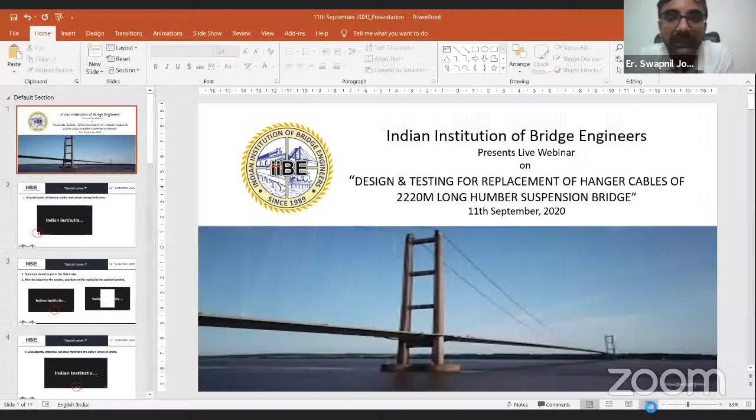Yes. Can I do the broadcasting? Yeah, okay, no problem. We can do, na sir?

Vinay sir, we can broadcast, right? Yes, broadcast kar dijiye. Only I hope that David is able to join. He's facing problems.

You have sent the panelist link, na? Yes, sir. Okay, then why is he not joining? Just now also, I just resent it again.

Sir, he's showing in the attendee list. I'm just promoting him. Okay, okay, promote him. He's joined from the wrong link. Doesn't matter.

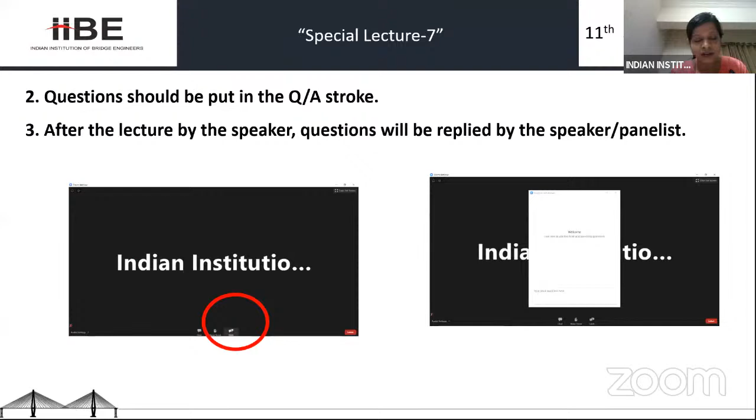Thank you, Deepika. Good evening, everyone. Before we start the event, I would like to read the basic rules and guidelines for all the participants. All participants will remain on mute mode during the lecture. Questions should be put in the question and answer section. After the lecture by the speaker, questions will be replied to by the speaker and panelist. Subsequently, attendees can raise hand using the option on screen. During questions, specific participants will be unmuted by the organizers.

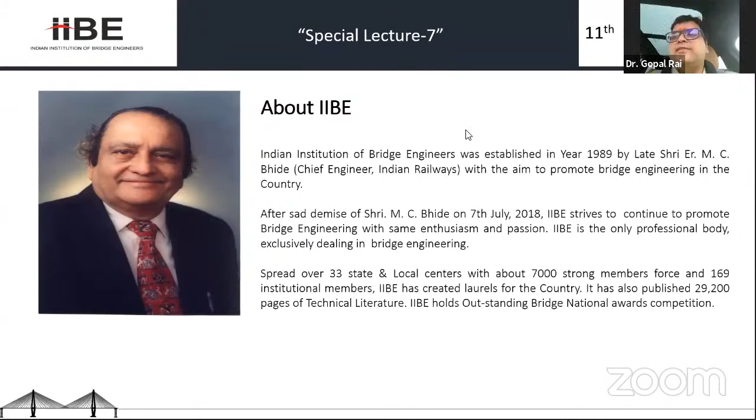Let me introduce our Director General, Engineer Dute ji. He retired from Indian Railway as PCE. He is an engineer from COEP College of Engineering, Pune.

Always, for any decision, he takes a pause, but after 2 minutes of pause he is very firm on his decisions. Such an eminent Director General, under his guidance and blessings, things are going in a very positive direction. He always supports the young generation and encourages doing a lot of activity. He is the next person after Bhide sir from whom we take a lot of guidance and encouragement, and he encourages a lot in lighter moments too. Thank you very much, our Director General, Dute ji.

Thank you very much. Next, our President, Vinay Gupta ji, one of the stalwarts in bridge engineering from TCPL, having bridge engineering experience of more than 30 years, having designed all kinds of structures in bridge engineering. Let me give a short introduction to IIBE as a president. If today IIBE is revamped, in Hindi we can say Junodhar. Junodhar means after Bhide Saab left, something has been revamped and reconstructed in the IIBE forum only because of Vinay Gupta ji.

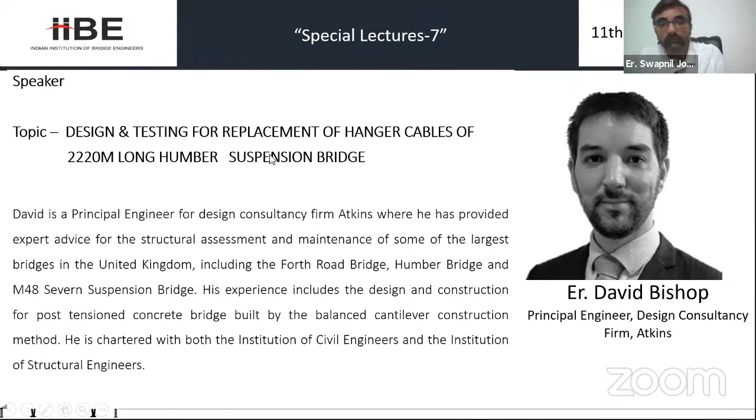He is going to speak today on design and testing for replacement of hanger cable of the 2.2 kilometer long Humber suspension bridge. David is the principal engineer for design consultancy Atkins, where he has provided expert advice for the structural assessment and maintenance of some of the largest bridges in the United Kingdom, including the Forth Road Bridge, Humber Bridge, and M48 Severn suspension bridge. His experience includes design and construction for post-tensioned concrete bridges built by the balanced cantilever construction method. He is chartered with both the Institution of Civil Engineers and the Institution of Structural Engineers. With this brief introduction, may I now request our speaker, Engineer David Bishop, to take over the forum and start his presentation.

This is Vinay Gupta here. While the speaker sets up his screen and other things, first of all, I'd like to thank the other people who have joined later on - the eminent dignitaries, Mr. Ravindra Goyal, Mr. Manjure, and of course many others.

I just want to share with you how this whole lecture came about. I contacted the HOD Civil Engineering of Atkins, Mr. Chris Handy, and he replied after a while saying, look Vinay, I just returned from 2 weeks of annual leave and I'm too tight pressed with time, but I certainly will spend time on a lecture with you after a while. He gave some options, and then one option from his own company Atkins UK - Mr. David Bishop, who was personally involved in the replacement of hangers of the suspension bridge. Now we all know that any cable-supported bridge is said to be fragile.

It needs to be made more long lasting and durable by several means. Any cables that we provide must be replaceable, whether it's a cable stayed bridge or an extradosed bridge. I won't say only extradosed cables can be replaced, or in a suspension bridge, which is very important.

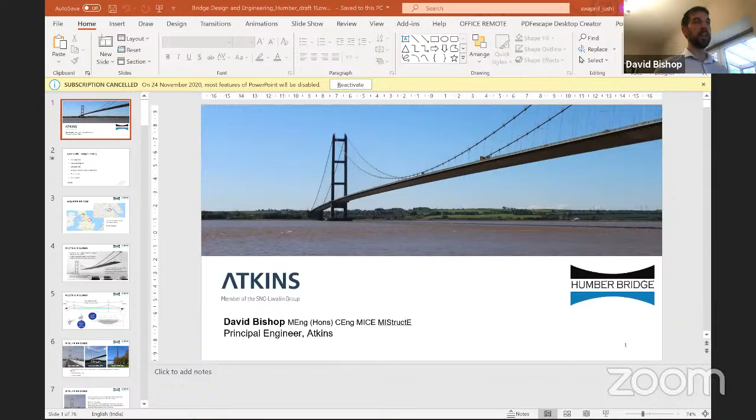If we go on to the next slide, please, you can see the agenda for the meeting. First, I'm going to talk about an introduction, then facts and figures of the structure, the background, and really the reason for carrying out this testing—there's been very detailed testing carried out of the hangers. Then the analysis and testing specification we put together for the bridge, the test conclusions, and the results of that testing will be presented.

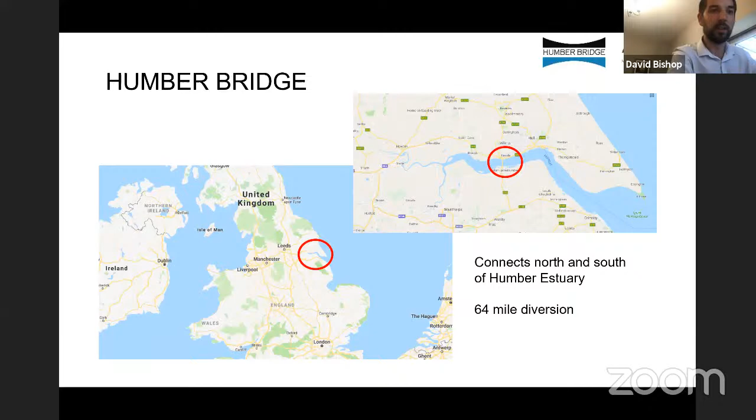We go on to the next slide, to tell you a little bit about the Humber Bridge itself. It was opened in 1981. When it was opened, it was one of the longest bridges, or longest main spans, in the world. At the moment, we believe it's still around the 11th longest bridge in the world. It's certainly a major feat of engineering. It is the longest suspension bridge in the UK, and it's still the longest in the world to walk or cycle across. It was the first suspension bridge to use reinforced concrete for the towers—previously they were all steel.

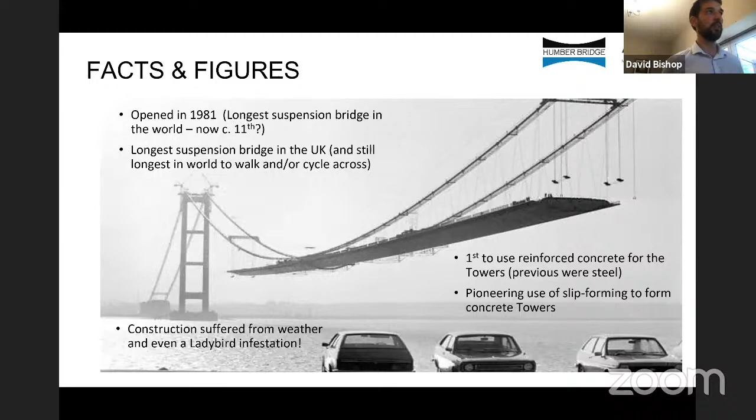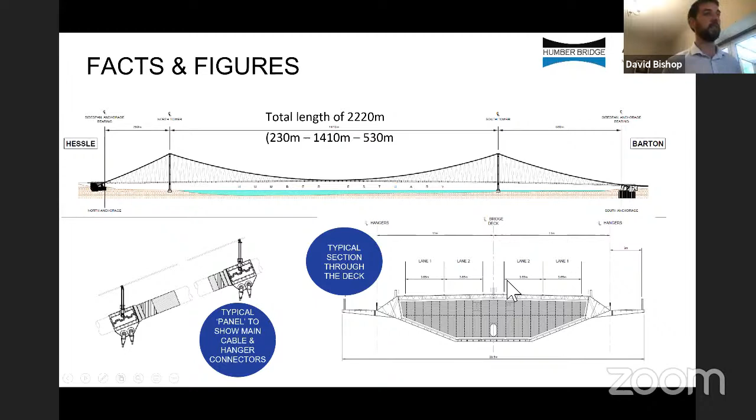So on to the next slide, we can see, I believe, 3 different bridges that were constructed by Freeman Fox and Partners. The Severn Bridge was constructed in 1966. It was the first bridge, and it had significant issues due to the inclination of the hangers. The hangars had first reported wire failures of individual wires after 8 years in service. After 22 years of life, all the hangars of the Severn Bridge were replaced. The reason for this replacement was partially manufacturing errors in terms of the alignment of the hanger and the socket, but also because of the way the bridge is comprised of triangulation of the hangars—there was a significant difference in hanger loads between the hangars inclined towards the tower as opposed to the hangars inclined towards the centre of the bridge. I'll talk at length about that later on.

The Bosphorus Bridge, built in 1973, had its hangars replaced in 2016. Interestingly, the hangars for that bridge were replaced with vertical stay hangars. So we were approached by the Humber Bridge Board in 2017 and asked—well, our hangars have been in service for 38, 39 years.

Should we be replacing our hangars? And if we do need to replace them, how do we replace the hangars? So if we go on to the next slide,

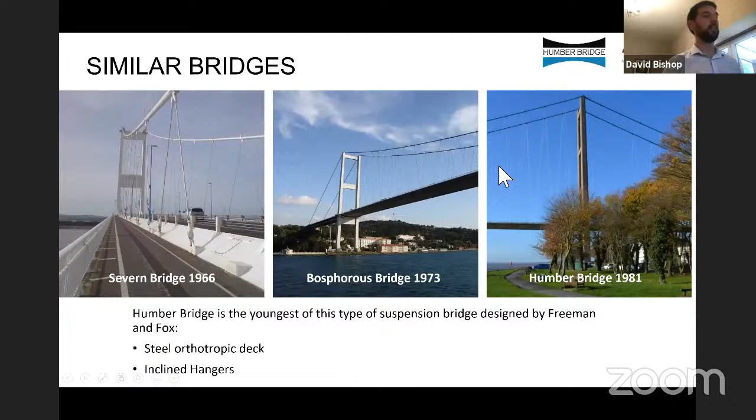this talks in detail around the Severn Bridge and the issues that I just highlighted. So 22 years when the hangars were replaced, the fatigue life was adversely affected by the difference in the permanent loads in the hangars that were caused to go slack.

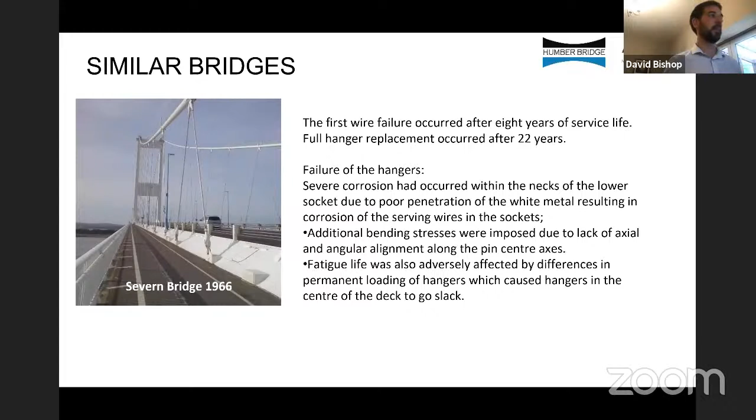If you go on to the next slide, this shows the Bosphorus Bridge, and it shows how the hangars were replaced. The hangars being replaced with vertical members rather than inclined hangars to take away the issues of the inclination.

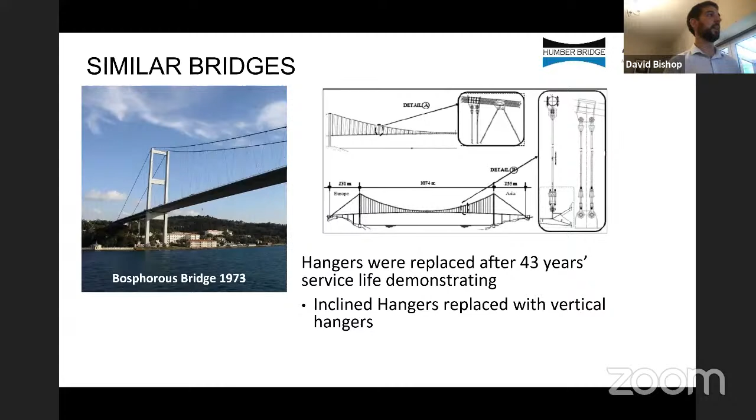The next slide will show you the Humber Bridge hangars and the connection to the deck section. Now the Humber Bridge has 484 hangers. The hangar life is approximately 25 years, or was designed to be approximately 25 years. So having currently got 38 years in service, the hangars are old and they're due for replacement.

However, what we quickly determined when we went to site is that they were in good condition. Visual inspections throughout its life had kept the hangars in reasonably good condition without much sign of corrosion.

Now on the right hand side there, you can see a little bit of a makeup of the hangars. It shows that the hanger cable, the lower socket, which allows side sway movement of the bridge, also longitudinal movement of the bridge, which helps to reduce the bending forces within the cables.

The articulation link between the main cable and the deck stool also allows a minor adjustment of 8 mil plus or minus to change the load in the hangars. And that was used for during construction. So we go on to the next slide.

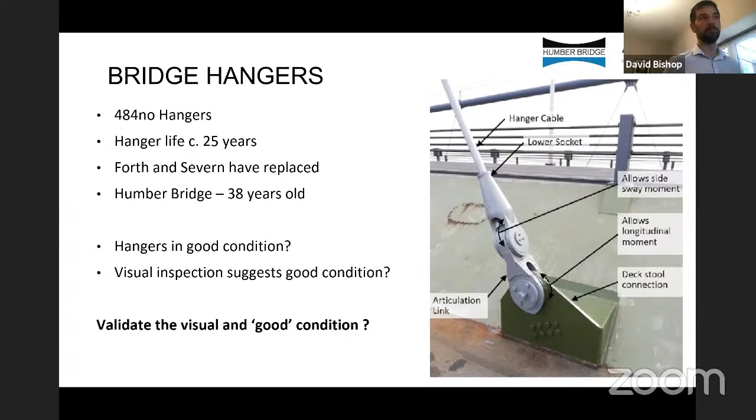So what we're looking at, is it feasible to replace all the hangars in situ without closing the road? Or is it feasible to carry out hanger testing of these hangars to see if we can keep the hangars in physical condition? Now, we decided there was a significant cost benefit if we carried out extensive testing of these hangars to prove that they had significant design life left.

Now, physical testing meant that we had to do fatigue and ultimate tensile testing in the zones of the highest stress. So part of our exercise was to determine which hangars were the most critical and highly loaded, and also to avoid structural health monitoring infrastructure. It should be noted that this building is a listed building consent, so rules in England are such that...

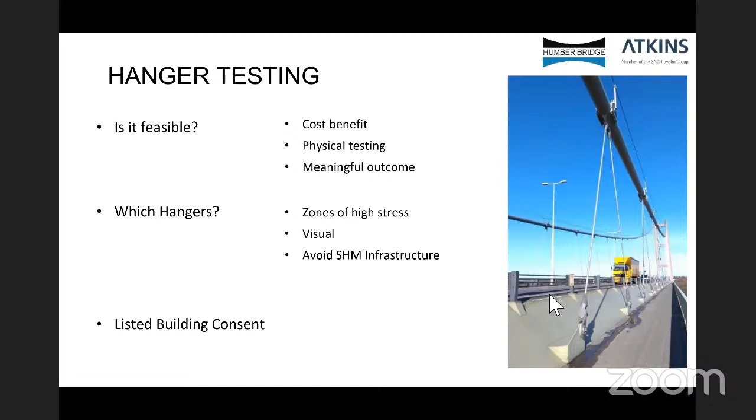So we put together a team, and the project team put together by Humber Bridge Board was Atkins as the designer and the structural checker of the bridge. Spencer British Engineering is the contractor who's going to carry out the construction works. COWI was supporting them in some temporary works designs of access platforms. Bridon-Bekaert Ropes Group are the fabricator of the new hangars that were going to be put in place for the bridge.

DNVGL are the team that are carrying out the extensive testing. So we look on to the next slide.

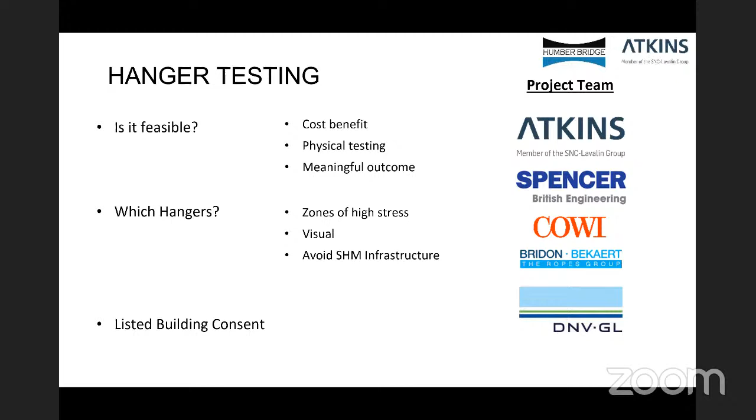Our structural analysis of the bridge found that the hangars immediately off center of the center of the bridge had the highest both dead load and highest load in service. This was critical because it had the highest fatigue range.

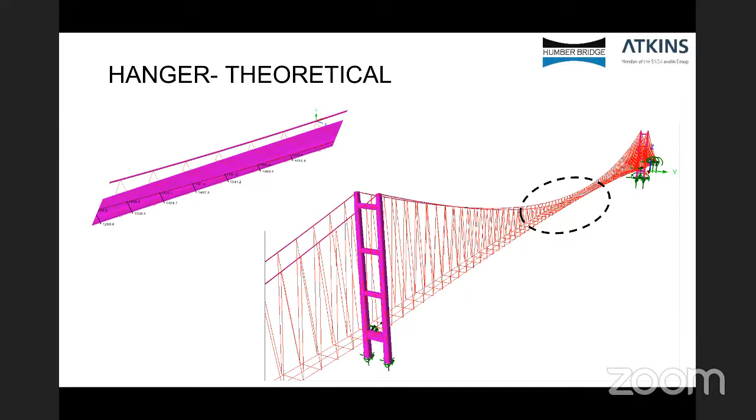This shows the hangers from the visual survey that was carried out to look at the condition. Using a combination of the worst fatigue loading on the hangars together with the condition, we were able to identify the worst hangers on the bridge for a destructive test. The one in red there is hanger 16-17, and it was one of the ones selected for replacement and testing, along with two other hangars.

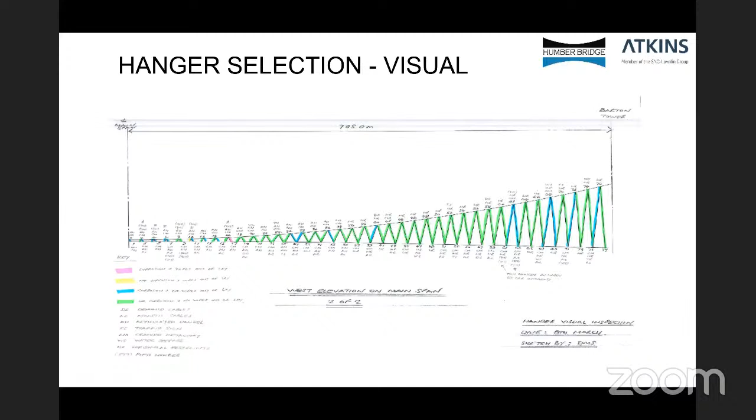So at the end, we selected 3 hangers from the west side of the bridge. This details the 3 hangers. What we wanted to do is select hangars that were going to adequately represent all the different conditions of the hangars, but also that were possible to replace in an easy manner without damaging the hangars. These hangars ranged from 9 meters down to 4 meters in length and were considered the best hangars.

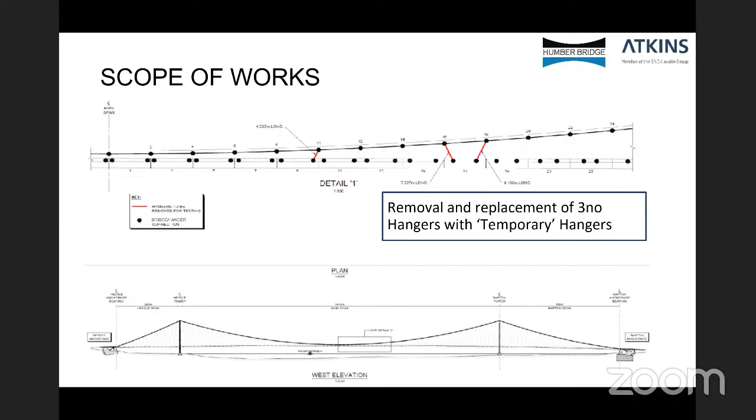This gives you some of the details around the temporary hanger arrangement. There were various options chosen, but what was critical for the design of the temporary hangers is that the hangar creep and elongation over its in-service life didn't cause a significant change in the load pattern of the bridge. If we installed a hangar that hadn't been correctly shaken out with correct frequency analysis and frequency loading of the new cable, that would cause a distribution of loading throughout the adjacent hangars.

To avoid that, the best hangars we could find were fully locked coil hangars that were adequately loaded. For that reason, we were replacing the existing spiral strand hangers with fully locked coil hangers.

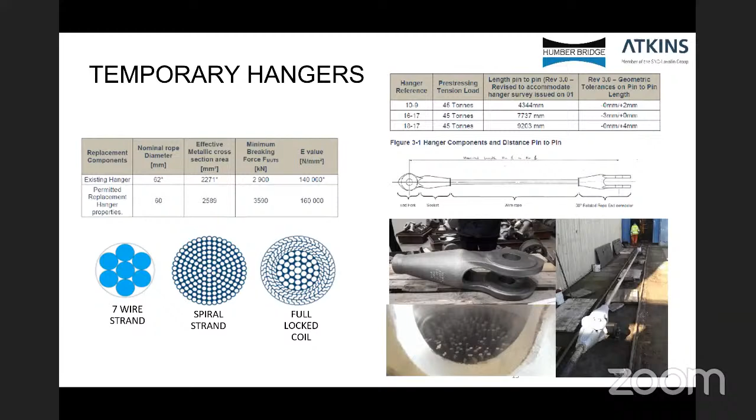So the hangars were assumed or designed to be in equal loading between the triangulations. To accommodate that, there was a small cam at the bottom of the hangars that allowed adjustment of the length to ensure the hangars were the correct length.

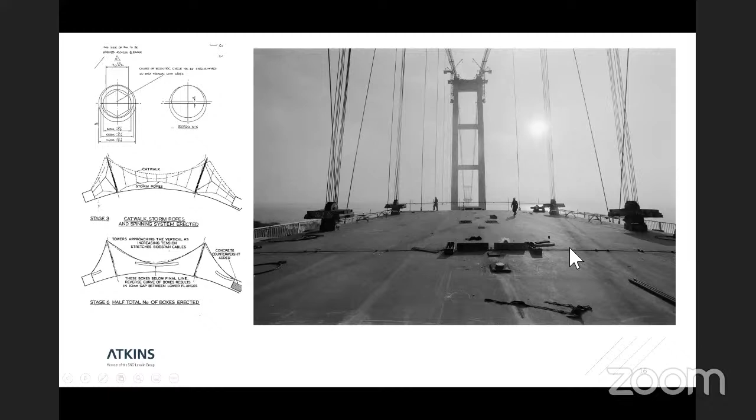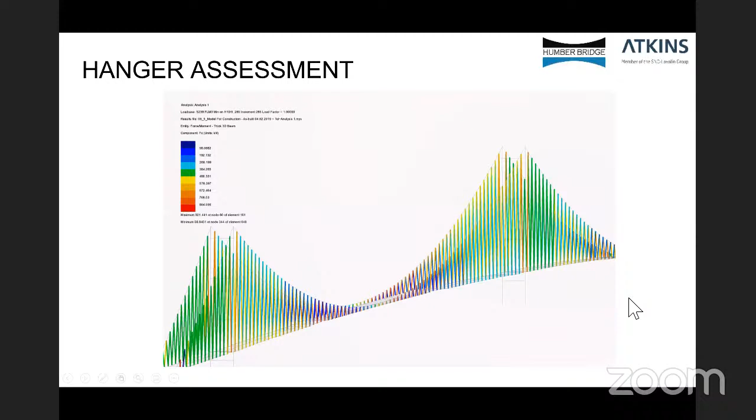So what we found is that the nominal load in the hangers aligned with our analysis rather than the original design of the bridge, whereby the hangers should have been equally loaded.

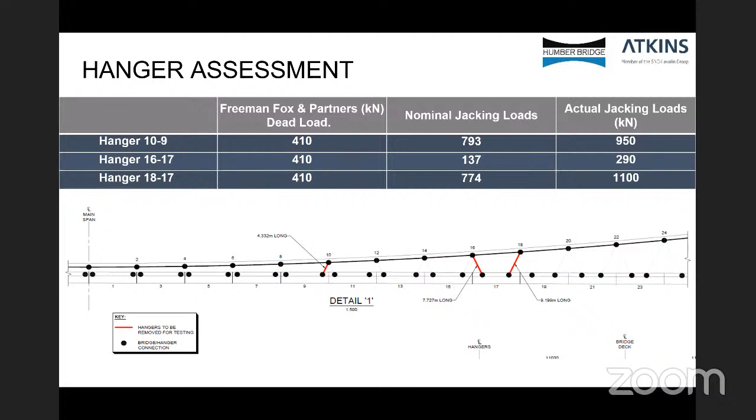This is another part of how we did the assessment. We use weigh-in-motion data, which as vehicles pass, weighs the vehicle, counts the number of axles and the size of axle loadings. From there, we use statistical distributions to calculate the theoretical worst convoy of vehicles, and we use that as the bridge-specific assessment live loading - used as the worst case assessment. If we use normal standard codes for loading, the bridge would be assumed to be overstressed, because loaded lengths of this length have a significantly lower probability of having high intensities of loading. This is taken into account by the bridge-specific assessment live loading.

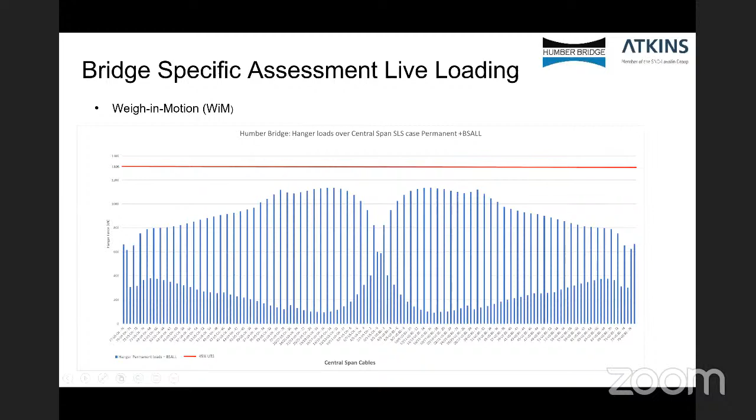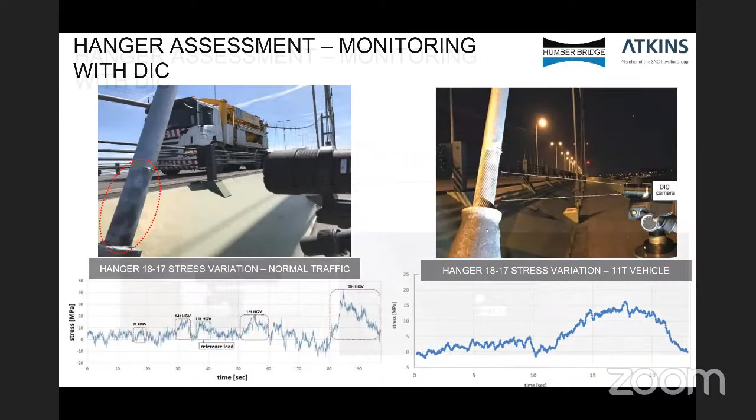This was in situ strain monitoring that we carried out for the bridge, using a digital image correlation system where we use very high resolution images of the fracture surface to determine strains in real life. This was correlated against our model and found to show good agreement, which enables us to understand the loading throughout the cable. The DIC monitoring was used not only for the micro strains of the cables on the hangers, but also for the overall movement of the bridge deck, which we found was also in agreement.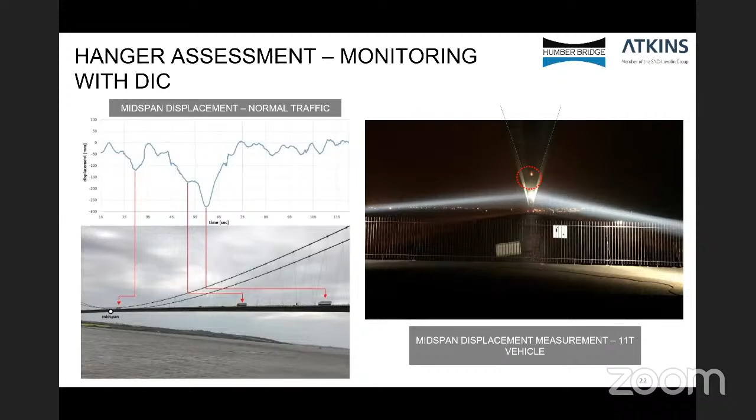So to replace these three hangers, we needed a temporary works design that could safely remove the hangers whilst the bridge was open to traffic. Part of the detailed analysis work carried out to date is, can we remove the hangers without closing the bridge and also without putting in temporary works to support the decks? Because of the loading distribution of the hangers, it was very critical that during the replacement there wasn't full live loading on the deck, so for that reason there was a partial closure down to 2 lanes.

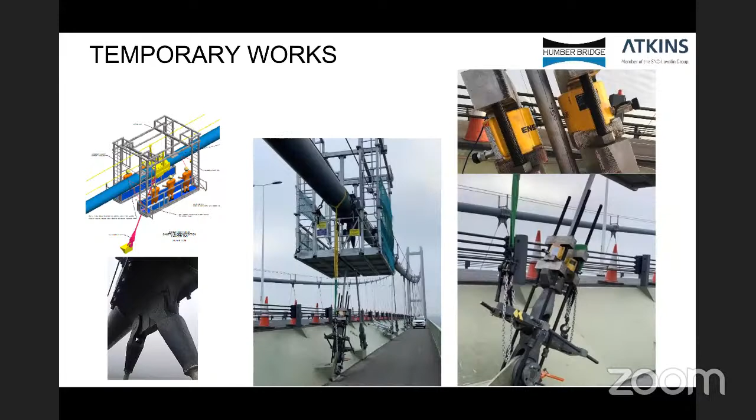COWI with Spencer's designed an access platform that could allow the temporary removal and jacking of the bridge to remove the hangers, as you can see in these pictures.

This shows the actual removal. The hanger is essentially jacked down towards the bridge, which increases the load in it. The pin is then removed and the bridge is slowly lowered to remove the load from the hangers, allowing gradual replacement of the hanger. It was carried out in one night, with one hanger removed and replaced each night, so over the works there were 3 hanger replacements.

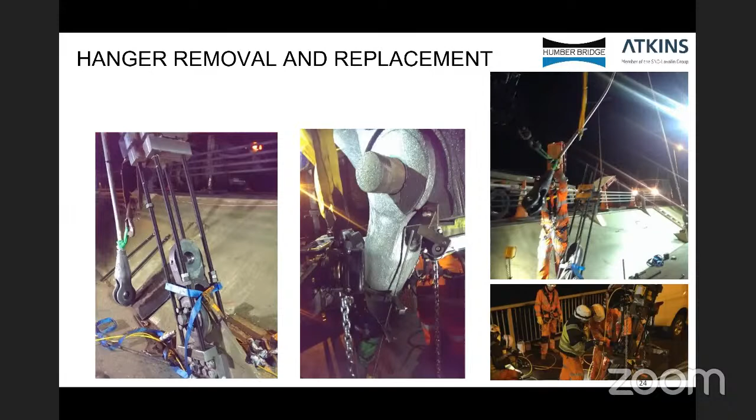These were the chosen hangers. Hanger 10-9 had the highest fatigue load range amongst the central span hangers, and the greatest maximum load under permanent and fatigue loading. It was 4.3 meters long. There was no visible signs of corrosion, but it appears to have wires out of lay, indicative of possible wire fractures, which was a particular concern we wanted to assess during the assessment. The hanger was tested for its residual fatigue life and ultimate tensile strength.

Hanger 16-17 had the lowest permanent load. As shown earlier, there was significant variation in load, and if the entire bridge was loaded, it was subjected to theoretical decompression under live loading. It was 7.7 meters long, and in the worst physical condition, with corrosion of wires, wires out of lay, and water seepage from the hangers. This was proposed to test this hanger to destruction.

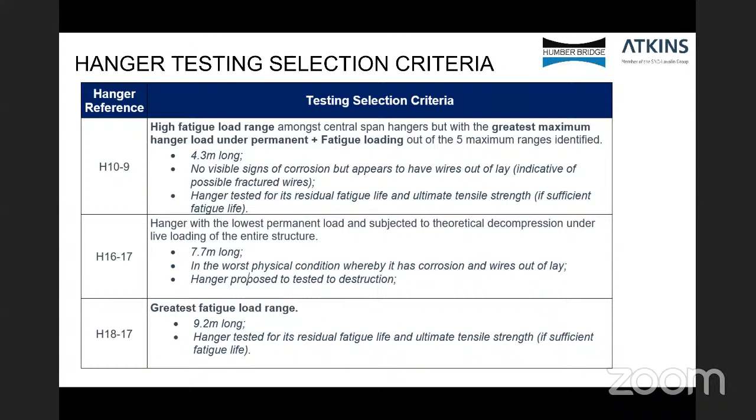Hanger 18-17 was 9.2 meters long. It had the greatest fatigue load, and again, it was proposed to test this to fatigue loading and ultimate tensile strength.

This shows an overview of the testing to be completed: visual examination, fatigue testing, ultimate tensile strength, fracture surface examination, chemical analysis. We did look at exploring the possibility of doing individual wire ultimate tensile strength to see if, similar to the NCHRP 534 report, we could re-derive the hanger strengths from visual observations. However, it was decided after testing that wasn't necessary, so it was taken out of the scope.

Again, fracture toughness - we hypothesized that perhaps fracture of the wires were controlling the failure mechanism, and for that reason, we would look at doing some fracture toughness evaluation. Again, that wasn't required after the initial test was carried out. All hangers were tested by DNV GL from Norway.

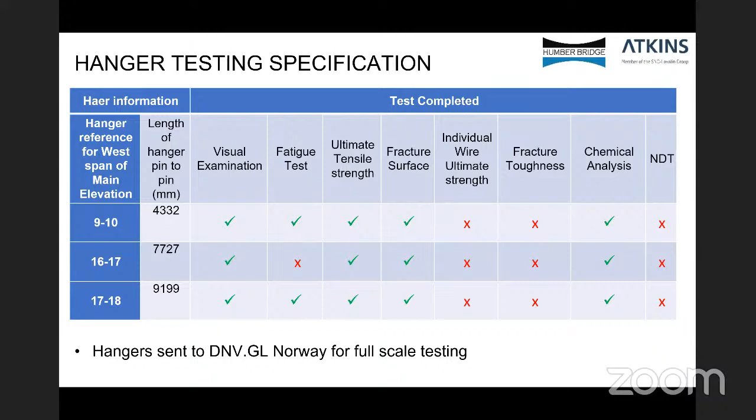So the hanger testing acceptance criteria for the fatigue test: if the hangers were able to survive 2 million cycles without detected breakage of more than 2% of the wires, then it was deemed successful. As long as there was no failure in the anchorage material or any components of the anchorage during the fatigue test, I would consider the fatigue test to be passed.

For the tensile test, it must reach at least a force of 95% of the minimum ultimate tensile strength, defined from the characteristic strength of the strand. Also, the strain under the maximum load should not be less than 1.5%, allowing for deformation inherent in the operation of the anchorages. So we move on to the next slide.

This shows the full-scale testing equipment that was carried out. This is for hanger 16-17. It's been set up for the ultimate tensile strength test, which is the first test we carried out. You can see there the condition of the wires. The hangers, although in pretty good condition, show a few wires out of lay and potentially painted over throughout its design life. So this is one of the worst condition hangers.

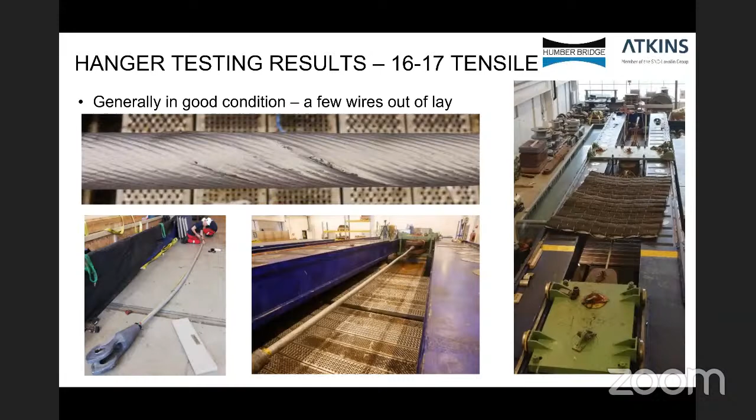If we go on to the next slide, we can see some of the test results. For this first hanger, it achieved an actual breaking load of 3,016. This was less than the original 3,216 nominal breaking load, but greater than 2,900, the minimum breaking load specified. So essentially it passed the test.

The breakage, interestingly, was towards the top, the upper socket, where we suspect the bending stresses will be higher due to the bridge sway. At the top of the hangers, there was only one articulation arrangement, so it had higher bending stresses opposed to the bottom socket. Again, the breakage results to the left had a 3.4% strain average strain, and therefore it passed the results.

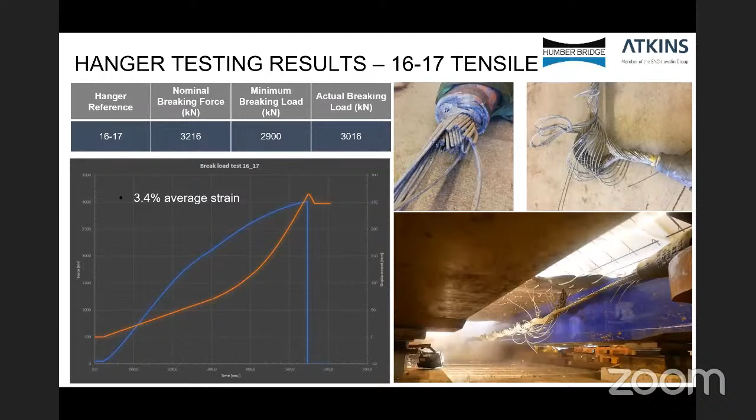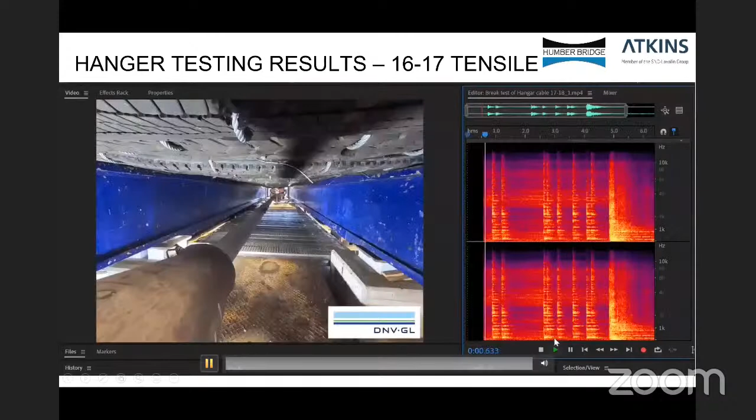If we look to the next slide, this is a video showing the actual breakage. Maybe if you can play it again, what you can hear immediately before breakage is some of the individual wires breaking before the entire cable fails.

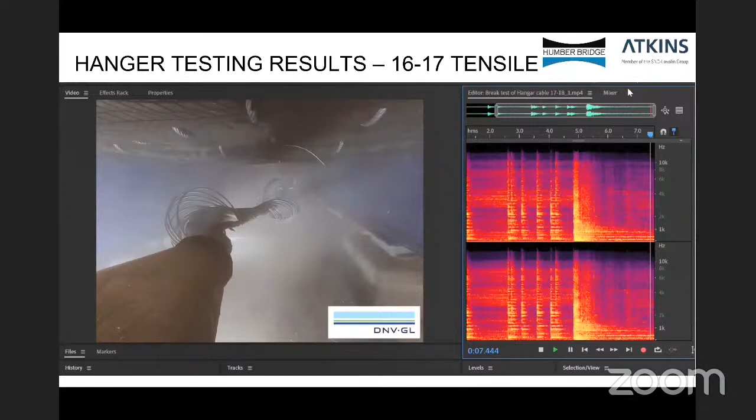So we look at the next slide. As part of the Severn Bridge, one of the things that contributed to the failure of those hangers was misalignment of the socket with the cable, as well as voids within the anchors causing significant corrosion. For that reason, the hanger socket was taken apart after the destructive testing. It was dissected and inspected.

The results of that were very good. There was no visible corrosion. The condition of the individual wire strands was good. There were some small minor air pockets within the zinc metal, but overall it was very good condition. Go to the next slide.

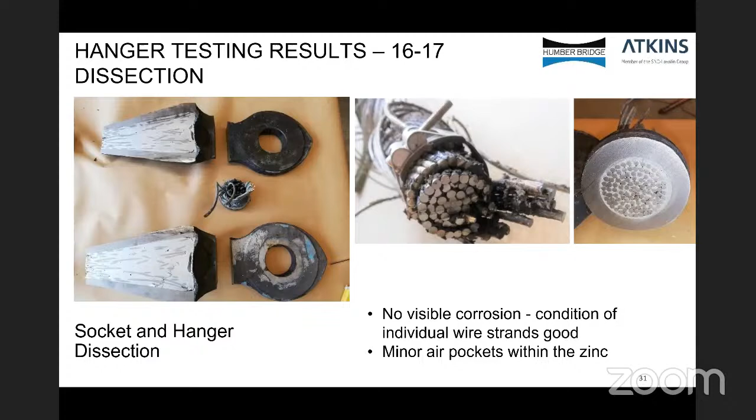This is moving on to the next hanger being tested, hanger 17-18. It was proposed that this one had an average Metalcoat paint of 600 microns, so a very thick paint. The cable also had internal lubrication and fluid inside, which had leaked out over some of the duration of its life. You could find more of the lubrication fluid at the bottom of the cable and less at the top. I think that was also causing further corrosion at the top of the hanger as opposed to the bottom.

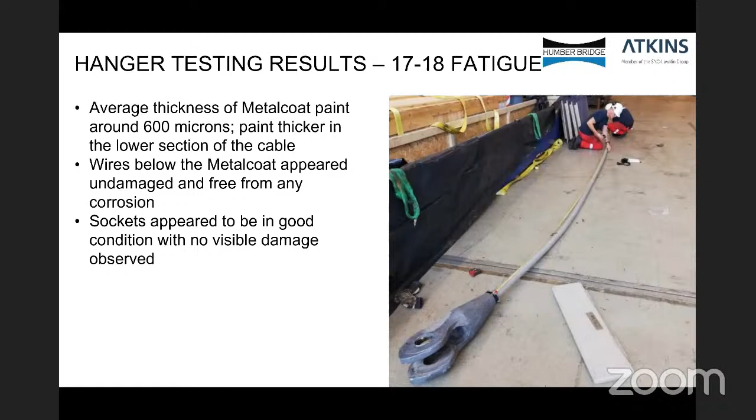So we look to the next slide. This was the fatigue testing carried out. The upper bound load was 883 kilonewtons with a lower bound of 705, a 178 kilonewton difference. The fatigue cycles were over 2 million fatigue cycles.

Now the stress range on hanger 17-18 was based on the FLM3, which is one of the Eurocode loading parameters, and that's a fatigue loading vehicle crossed over the bridge. It had the highest predicted fatigue stress of 78 megapascals over 2 million cycles.

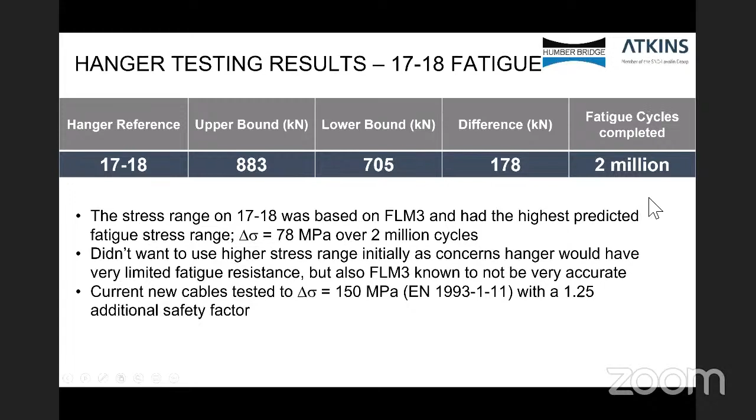Now, the British standards or the Eurocodes 1993 Part 1, Part 11, if you were designing a new bridge today, you would test for a fatigue cycle of 150 megapascals. However, we didn't want to test for a very high stress range initially because there were concerns that the hanger would have very limited fatigue resistance and therefore would fail. So because of that reason, we first tested to the known fatigue load of 78 megapascals.

We look to the next slide. This shows the test setup. Because of the possible misalignment between the cable and the sockets, this was included within the test by causing a misalignment of the socket by 0.6 degrees, as can be seen to the left-hand side of this. This is also recommended by BS EN 1993 Part 1 when carrying out the construction of new bridges. We'll look to the next slide.

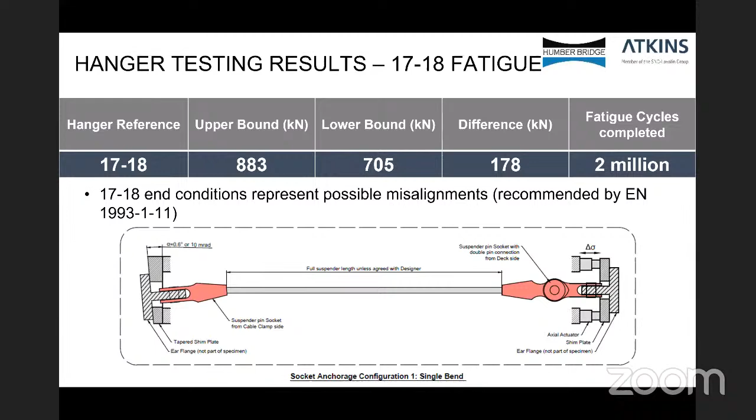This is a picture of the hanger fatigue testing being carried out. The bar to the left-hand side shows how they induce the rotation of the socket to cause that misalignment. The test was then set to a nominal 58 kilonewtons, 2% of minimum breaking, to allow for final inspections and measurements prior to the testing starting.

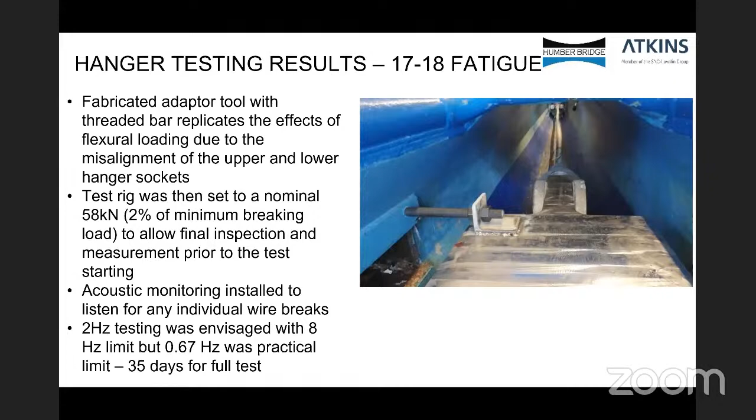Acoustic monitoring was installed to listen for wire breaks throughout the fatigue testing. The fatigue testing was carried out at 0.67 hertz, and that took 35 days for each hanger. So for the two hangers carried out, they were in the machine for over 70 days as the fatigue cycles were being loaded.

If you look to the next slide please. So the test was completed to 2 million cycles. There was possibly one wire break around 88,000 cycles because of the sudden increase in the peak through elongation. You can see that on the graph with that increase in elongation of the yellow line and the grey line.

And that's indicative of fatigue failure carried out during the testing. However, throughout the rest of the test, there was a very steady displacement, proving that there was no other damage during the testing. Look on to the next slide please.

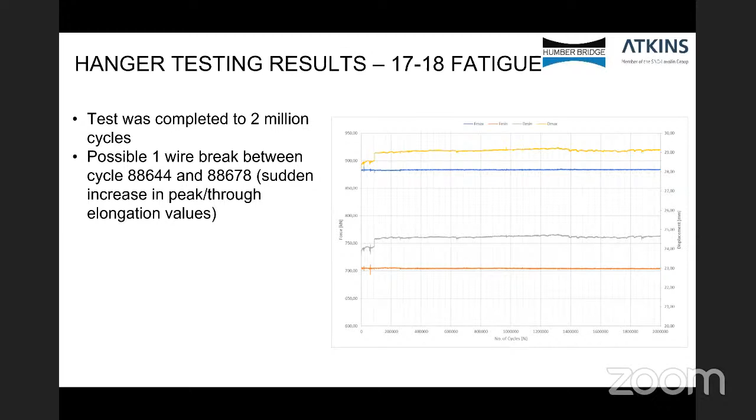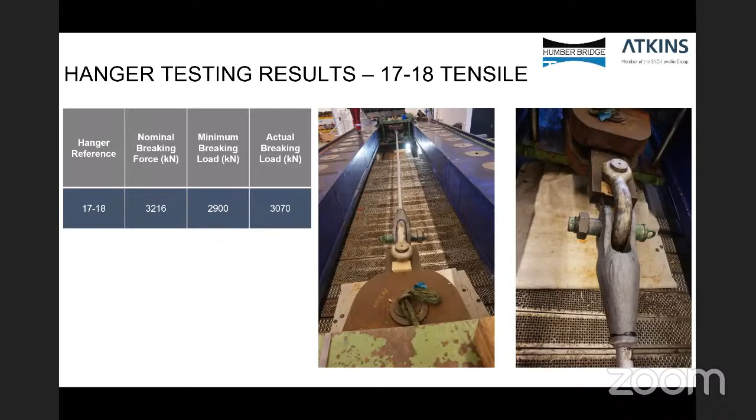This hanger, after it carried out the 2 million test cycles, was taken to be tested for ultimate tensile strength. It was possible that during the fatigue testing significant damage would have occurred, and then when the ultimate tensile strength test occurred, we might get a significant reduction in the breakage. But what we found was that the actual breakage load was very similar to the previous at 3070, again greater than the minimum breaking. So it was a positive result to prove that the hanger hadn't been damaged during the fatigue testing. Look to the next slide please.

This just goes through where the wire broke. It was towards the top socket where there was less lubrication because of the inclination of the hanger. There was also some more corrosion damage. On dismounting of the wires, we found that on layer 3 there was one potential wire break detected during the fatigue testing.

The mode of failure for each individual wire was a ductile failure, and we didn't see, in this instance, a brittle failure of the wires. So we go on to the next hanger.

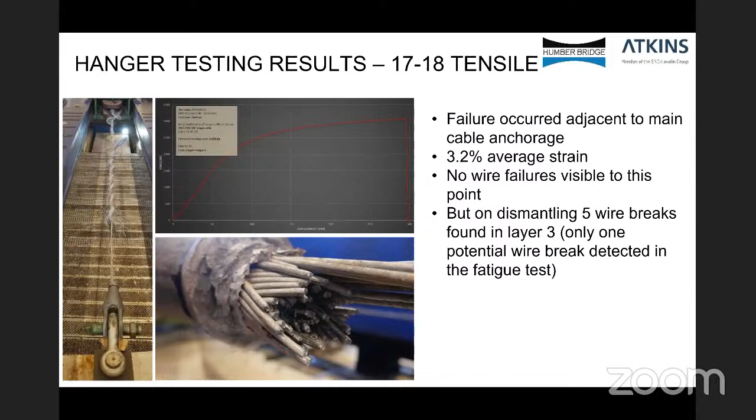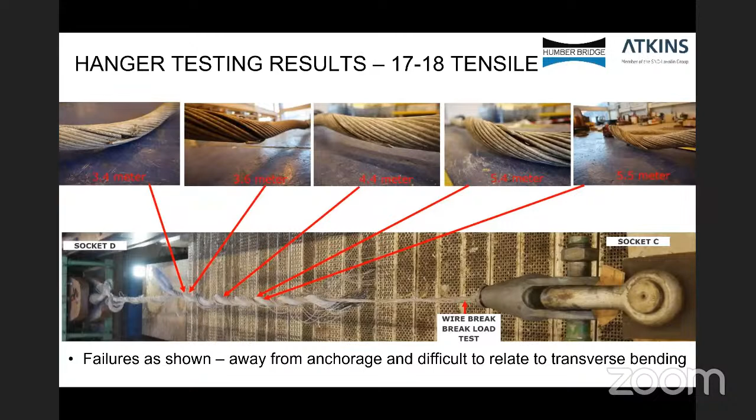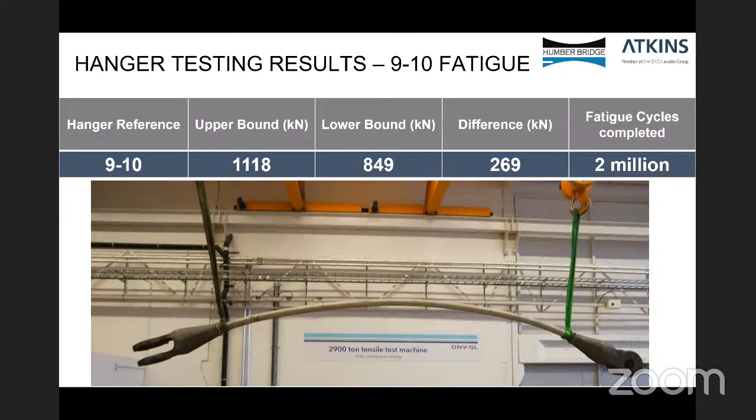If we look onto the next slide, this shows the test setup. In this instance, we assumed that one of the bottom hanger sockets had seized in rotation, which would cause additional bending stresses to the hangers. So for that reason, we tested the 2 million cycles with two bends, one at the bottom and one at the top.

Rather than testing at a similar stress range as the previous hanger, we tested at an increased stress range, as I've said, of 119 newtons per millimeter squared. Can you go to the next slide please?

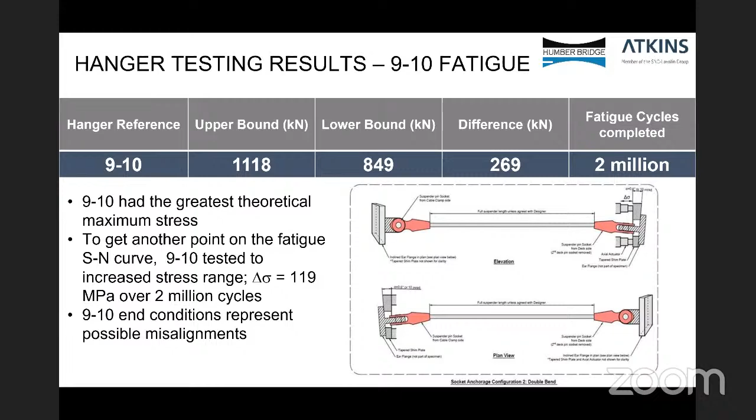One of the things that happened during this testing is we'd specified the testing to be carried out in 2019. During the actual testing of the first hanger, there was some research being carried out by the group that looks after the Eurocodes, working group number 11. This found that the lambda factor, used to calculate the damage equivalent stress, had no obtainable background, and because of that there were concerns raised about the use of FLM3 during the assessment.

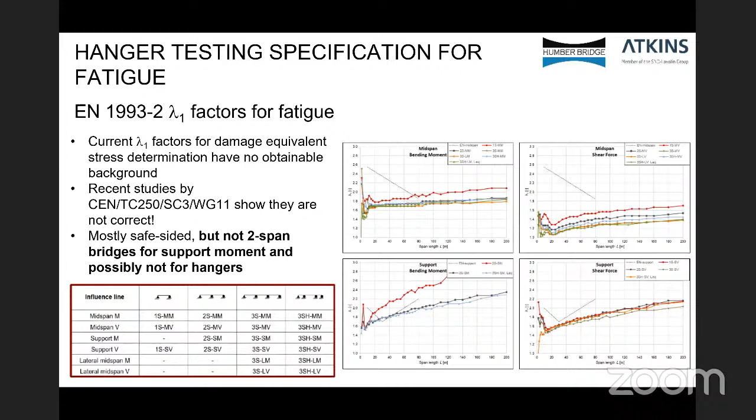If you look to the next slide, the concerns that they found were that mostly FLM3 was conservative, but in certain instances where there were long influence lines, particularly for two-span bridges, the lambda factor wasn't conservative. In our instance, the Humber Bridge had a very long influence line because it's a cable-supported structure, so we had concerns that in the initial test we did, the lambda factor wasn't appropriate.

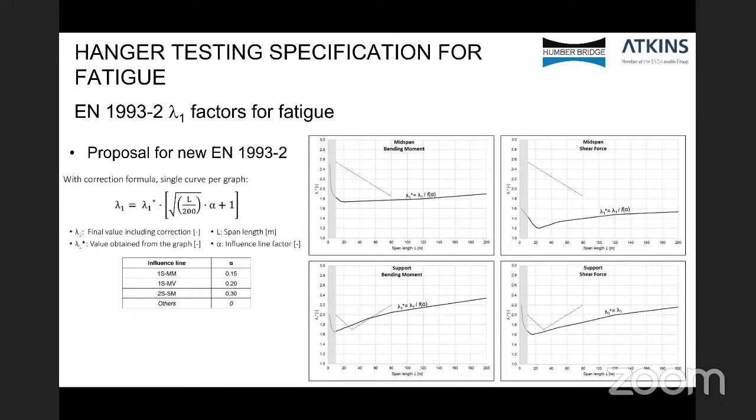If you look to the next slide. Now, before February 2020, the original SN curve is shown here at 150 megapascals, and we carried out a test at 78. Let's look to the next slide.

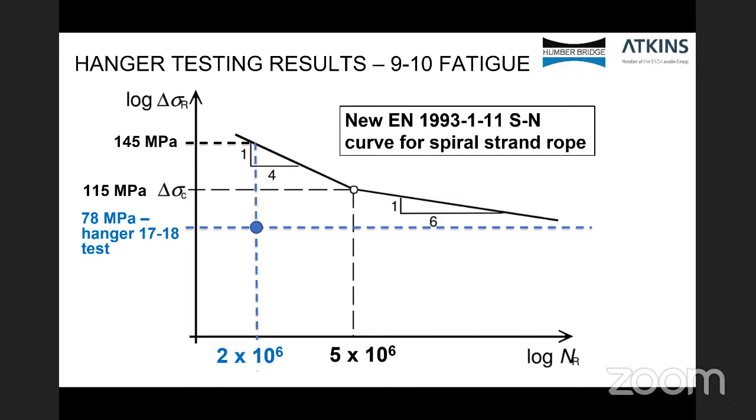This shows the new curve proposed to be carried out to 145, but critically at 115 megapascals, they proposed to have 5 million stress cycles. For the second cable, we proposed to carry out our testing to 119, which was an alternative proposal for the 1993 SN curve.

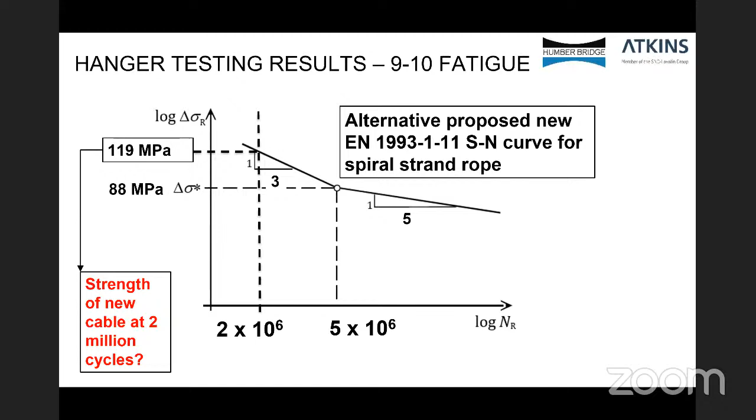This is looking at the fatigue results for Hanger 9-10, which was under higher load. Again, there was no evident damage at the end of the fatigue testing.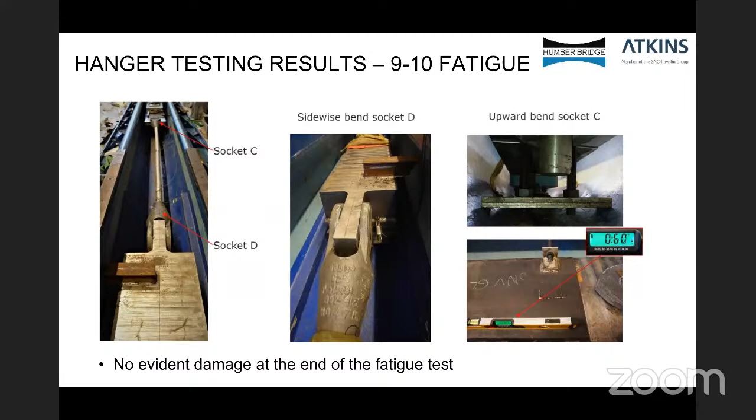Damage during the testing - you can see around 800,000 cycles there was a significant jump in load, and we think that was due to two wire breakages caused by the fatigue loading. Although no wires could be seen broken on the outer surface, these wires were broken on the inner surface.

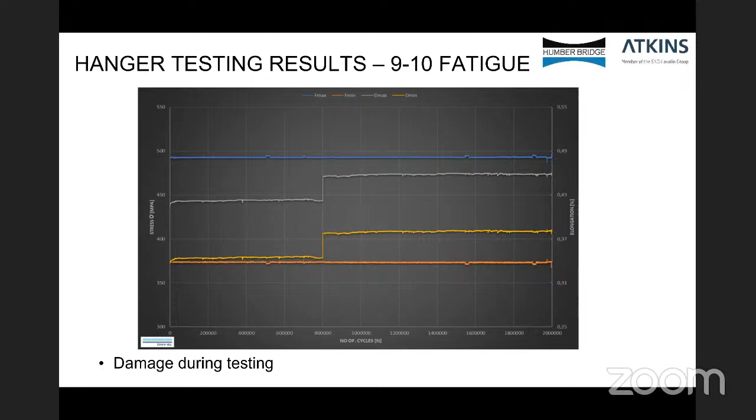Tensile strength results after the fatigue testing, again very similar results, 3025 with a 2.9% average strain. The failure was at the top end of the hangers, and you can see the breakage close to the hanger, close to the socket.

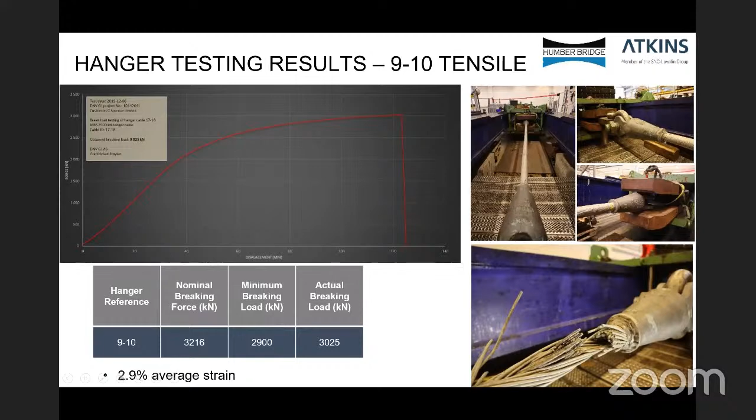Because we had concerns over the FLM3 modeling we'd done, particularly around the lambda factor we used, we did a further analysis of the bridge for fatigue load model 4. That is a much more complicated fatigue model than fatigue load model 3. It includes over 23 different vehicle designations, and it runs the different vehicles in different convoys across the bridge. Although it's quite analytically heavy, what that proved was that although the lambda factor was quite inaccurate for long span bridges, it proved that the stress range throughout the hangers was within what we previously specified.

What you can see here on this graph is the difference between the dots is the fatigue range that we determined.

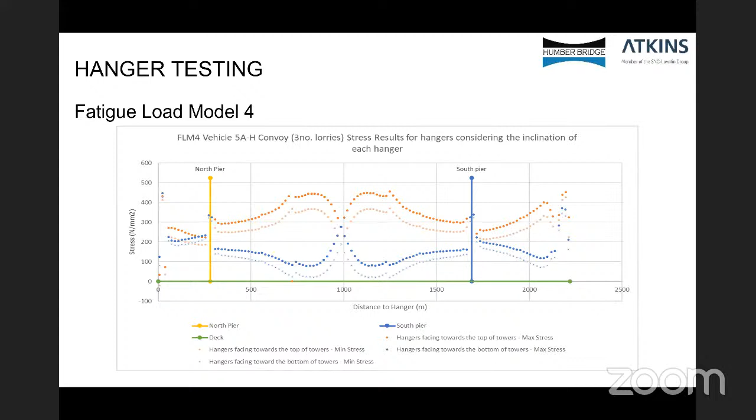This shows the procedure for counting the different vehicles and counting the number of stress cycles used in fatigue load model 4. What's interesting to note on the left-hand side is the influence line is very long - you can see it, nearly the entire length of the main span, and that's due to the fact that the inclination of the hangers causes a change in load regardless of position on the bridge, because it changes the permanent load distribution within the structure.

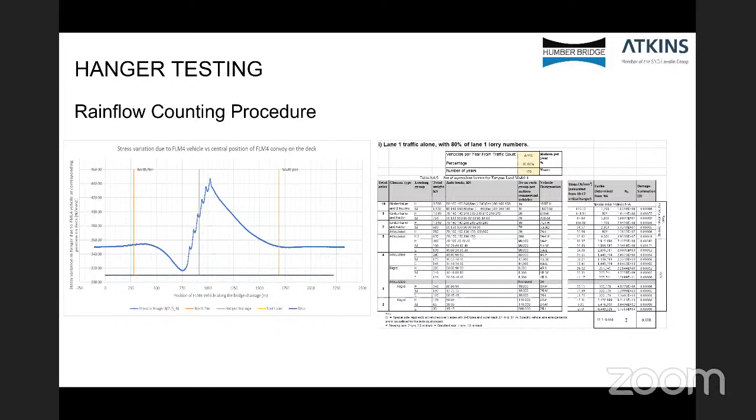On the final hangar, we found one of the surfaces had a ductile failure. After doing fracture surface examination, we found some corrosion pitting to the top of the wire. There was a probable, although we can't confirm this, fatigue propagation throughout the fatigue cycles, and then the hanger or the wire failed in breakage due to stress concentrations in the lower proportion of that slide.

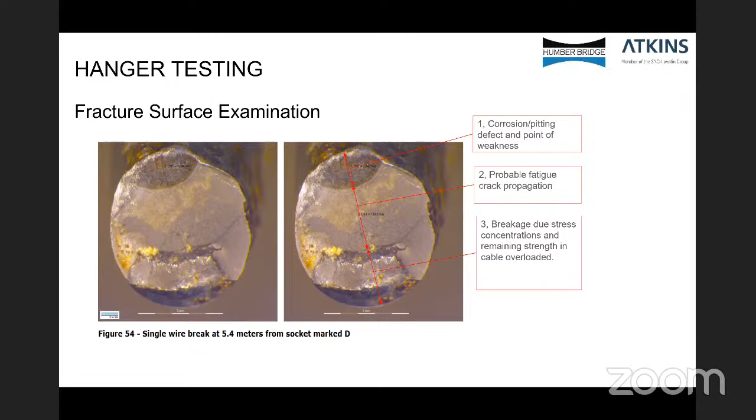As well as doing fracture examinations, we categorized each wire based on the NCHRP 534 method that looks at the amount of oxidation as well as rusting on the cables of the different layers. What was interesting was on the outer layer, the corrosion category was stage 2, and on the second layer, there were some wires found to be in stage 4.

The reason for this is that the outer wires were protected by the zinc coat. However, on the internal wires, where the lubricant had leaked and water had managed to get in, there was additional corrosion on the inner wires. In general, however, we found that the majority of wires were in reasonably good or very good condition given their age and in-service use, and it hadn't caused a detrimental reduction in either ductility or strength of the individual wires.

Look to the next slide, please.

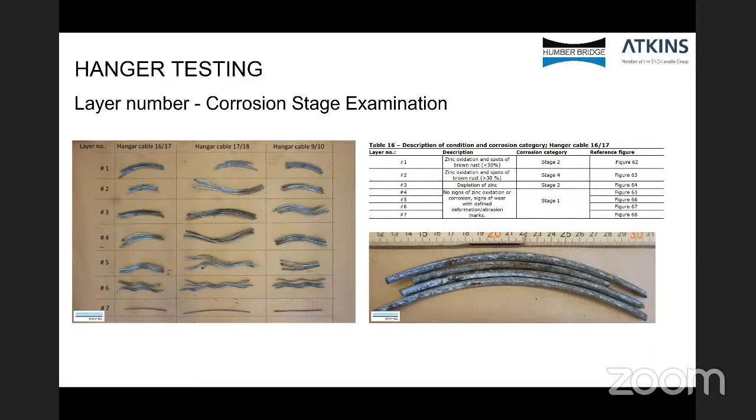Overall conclusions: there's a residual fatigue life confirmed based on the FLM4. The fatigue testing proved that the hangers had significant further life. Failure after fatigue remains ductile, so warning is expected, and current factor of safety is over 2. The corrosion protection system is key to good service life. Replacement likely to be able to be deferred, as current condition indicates 120 years more life without environmental deterioration.

What we're doing is we would quite like to share these results with other long span bridge owners so that it really promotes low intervention structural refurbishment. In this instance, we could have gone down the line of replacing all the hangers - we've certainly developed a methodology to do that. However, although expensive, this testing has confirmed that there's significant residual life in the hangers, and deferring the replacement by 10, 15, 20 years, depending on the effectiveness of the corrosion protection system, will have a significant whole life cost benefit to the bridge at the moment.

Let's look at the last slide, I think.

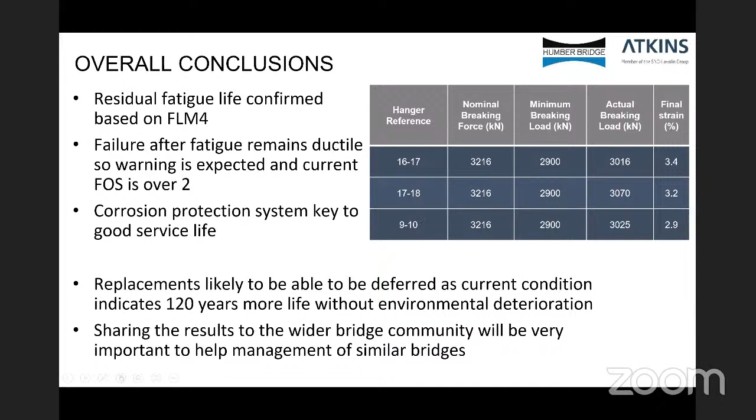Acknowledgements - the project wouldn't have been possible without everyone else, part of the team: Spencer, the contractor COWI, Bridon, and DNV GL, also the client Humber Bridge Board have all played a key role in making sure this project is a success. The client is in the process of looking to extend the life of the hangers and carry out more corrosion protection measures to continue the life of the hangers, which saves both taxpayers' money and the environment, with a minimal intervention approach.

If you've got any questions, then I'll be happy to help. And I would like to apologise a lot for the IT issues that I had at the start of the presentation - having to work from an iPad isn't ideal.

So David, there are certain slides after this also. Okay, so this is the last one, right? I mean, that's the last. Yeah, that's the last one. Yeah, I put some extra slides in there around digital image correlation in case anyone had questions about how digital image correlation works. However, that is the end of the presentation on the Humber. Yeah, great, so shall I take over, Swapnil? Yeah, yes, so you can just.

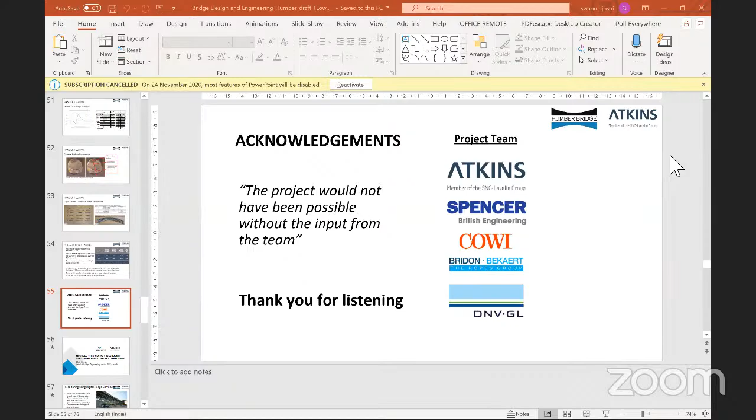Thank you, David, for such an excellent presentation. And really, it is one of the great projects, because the data you have captured through this project is quite rare for the bridge community, and that will probably change a number of codes.

Before I start getting questions from the participants, I have a few questions for you. First is basically: you have checked using the FLM3 as well as the FLM5 or FLM4 models, fatigue loads of this Eurocode.

Okay, hello Mr. David? Yes, yeah. But since the bridge is in operation, you could have obviously taken a reading from the actual traffic running on the bridge, and with statistical processing,

you could have used the FLM model 5, which is the actual model, and you may have gotten some different results. Yeah, we did consider that. We had weigh-in-motion data from 2013. After that, the weigh-in-motion data stopped working, and the client hadn't replaced it. We found that traffic had increased since 2013, and so we did use that data, but we only used it to calibrate the FLM4.